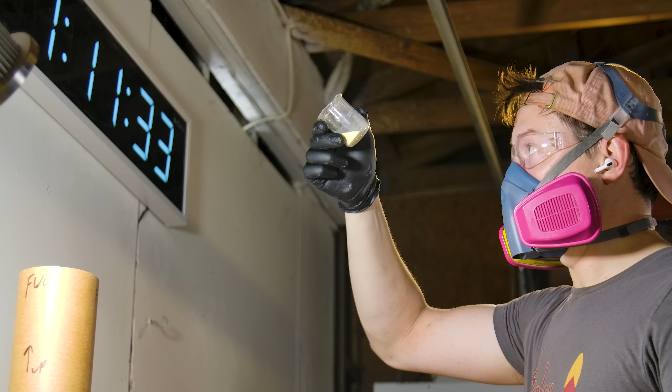3, 2, 1, fire. Nice! Okay. This is the culmination of months of work developing a new rocket propellant formula. It's a process that involved trial and error, lots of static fires on the test stand, some fires that left the test stand, and the worst mustache you've ever seen. In this video, I'll show you the exact formula for this rocket propellant and everything it took to figure out how it burns.

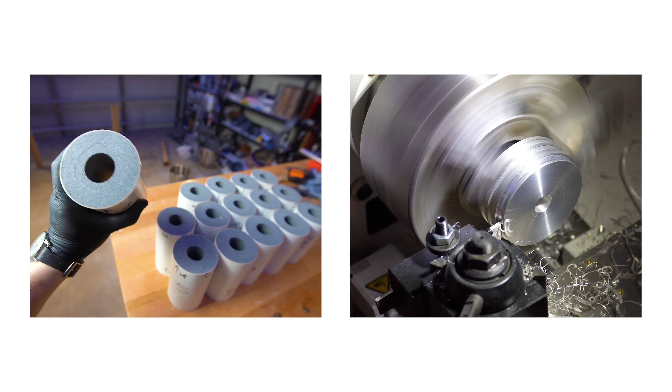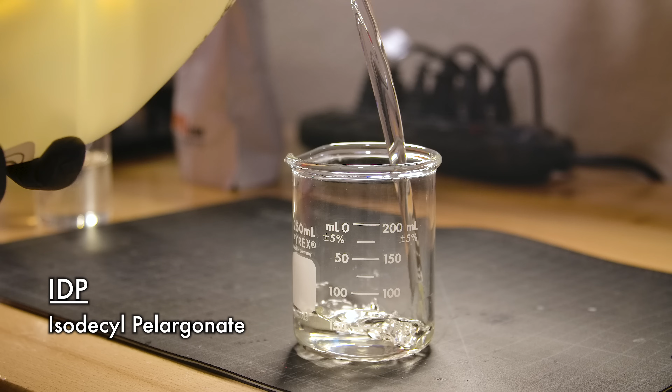I'm building a space shot, a rocket that goes over 100 kilometers. One of the biggest hurdles of this project is that I'm not buying commercial rocket motors, I'm building them myself. I've come up with a solid propellant formula suitable for these types of burns we need on the space shot, and in the last video I covered some of the basic ingredients involved, and we selected a propellant to use as a jumping off point. If you haven't seen that yet, I recommend starting there before watching this one.

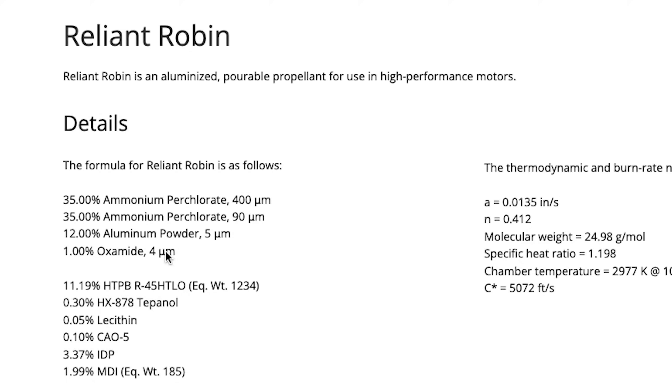This starting propellant is called Reliant Robin, and it was developed by Amadeo. The prop uses half and half 400 and 90 micron ammonium perchlorate, 12% aluminum, 1% burn suppressant, and then a multi-part binder with a few processing aids. Reliant Robin is a pourable propellant, which makes it much easier to work with, and it's actually very close to the burn characteristics I'd like.

That said, I'm interested in a slightly slower burn and increased pourability. The slower burn rate is beneficial, as a slower burn will reduce our maximum dynamic pressure and max heating on the second stage of the space shot at the small cost of efficiency losses. So, knowing our starting point, how do we take this propellant formula and slow down the burn rate? There are a few ways to do this.

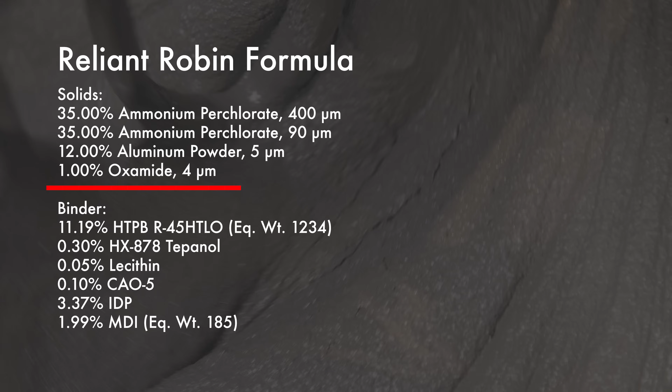You might remember from the last video, one of the components, oxamide, is a burn rate suppressant. So, how about we take that 1% and we bump it up a little bit? Of course, by doing this, we're going to end up with 101% of propellant, which, while that sounds great, we need to take that percentage point from somewhere else. To figure out where to pull this from, let's talk a little bit about ammonium perchlorate particle sizes.

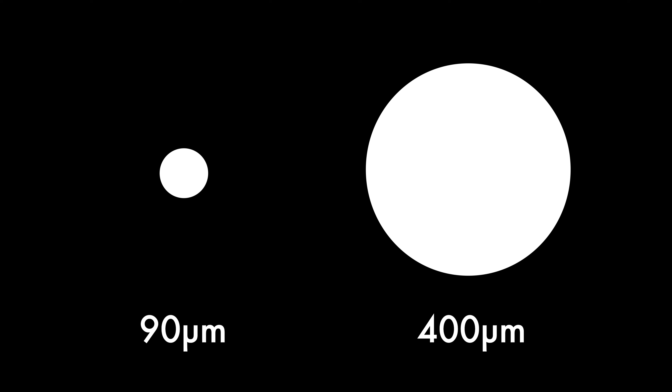On your screen, you can see two AP particles. We'll call one of them 90 and the other one 400 micron. Technically, these particles don't burn so much as they decompose really fast, but I'm going to use the term burn in this context. When they burn, they regress at the same rate. Knowing this, it's easy to see that because only the exposed faces of the particle can burn, the 400 micron particle spends much more time burning than the 90. This means that colloquially, the 400 micron particles burn slower.

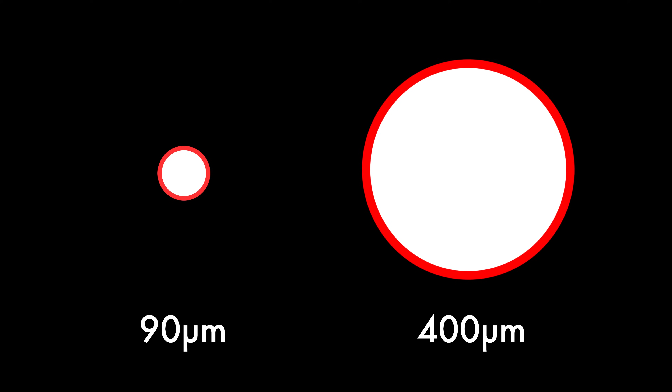In addition, an individual 400 micron particle has more burning surface area than a 90 micron particle at the start, but the burning surface area per unit of volume is much higher for a 90 micron particle because of how much more you can pack in the same space, making it functionally faster. This also makes the propellant more efficient for the same reason, and in theory you could pack an entire motor filled with 90 micron ammonium perchlorate. You'd get extremely high performance, and the only downside in our case would be that it would burn extremely fast.

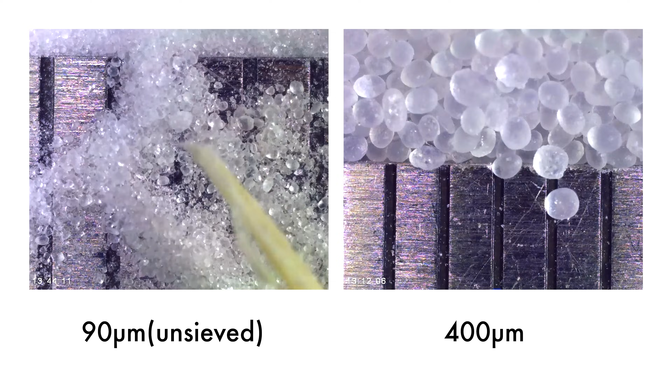Knowing all of this, that percentage change from the oxamide can come from the 90 micron ammonium perchlorate. So we'll knock that down to 34.5% instead of 35. This will have almost no effect on the propellant though. It's a very small change.

So with the knowledge that the 400 micron particle burns slower than the 90 micron particle, let's shift the balance a little bit. We'll go up to 52.5% on the 400 micron and down to 17% on the 90 micron. This is a more aggressive change, and it's not one that I was super confident in. 400 micron AP also reduces the structural integrity of the propellant a bit, but it does help with pourability.

Now, we're getting to the part of the video where I need to come clean. I'm no stranger to rabbit holes, but I have never experienced a rabbit hole like solid propulsion. I'm confident in sitting here and giving you some of the highlights, but there are aspects of solid propulsion that I still have trouble wrapping my own head around, and one of those is a field called rheology, which is the study of flow behavior. Rheology in the context of solid propulsion is all about the ratios between the solids and liquids in the formula and the particle size distributions in the solids.

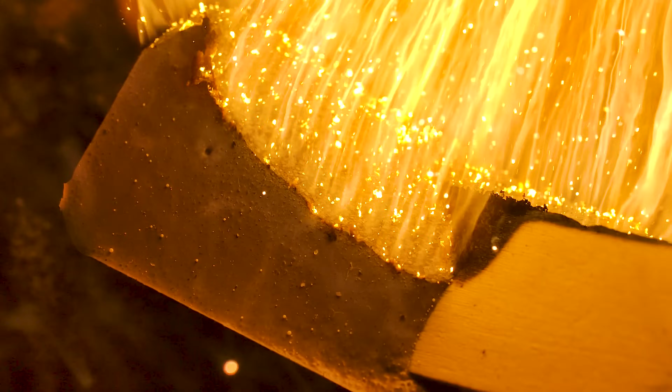We're not going to dive into this other than to say that a higher 400 micron content will help us with pourability, and with that covered, why don't we whip up a few batches of this stuff and see how it burns. My first move with this propellant was to make a few individual motors.

Before characterizing exactly how the propellant burns, I wanted to make sure that I had my processes and procedures down for mixing and casting. So I produced 3 motors with the same internal geometry and learned a few things along the way. The first batch I made was surprisingly non-pourable, which was a big disappointment initially, but it proves that I was right to make a few test batches.

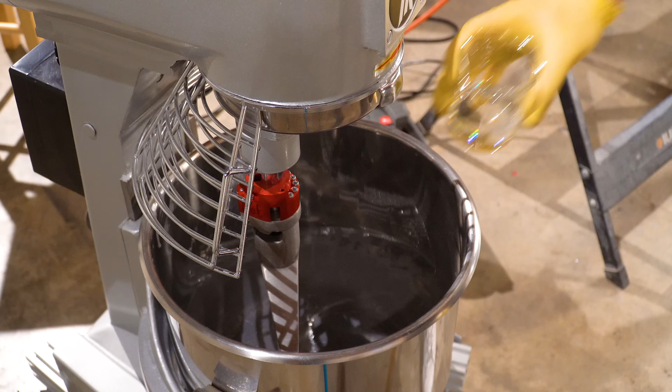The mix cycle I was using was alright, but after adding the curative in, we mixed for a further 20 minutes and aimed to vacuum degas for a whole 45 minutes, which means that the MDI curative was in for a full hour and change before attempting to pour the propellant into the liner. After seeing how poorly this poured, pun intended, I chatted with a few friends and learned that they all mixed their curative in for much shorter periods of time, so we ran a second batch and tried again.

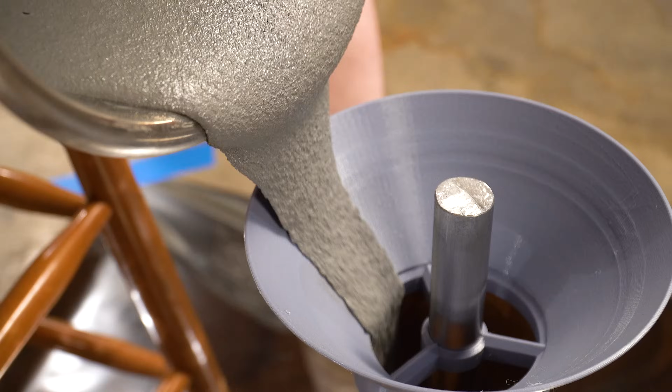On this next batch, I only mixed the curative in for about 7 minutes and vacuum degassed for 10, and the results were much better. It was the exact same mix except for the curative cycle, which was only 17 minutes instead of 65. And with this, our main issue is solved, right? Only thing left to do is extract the mandrel.

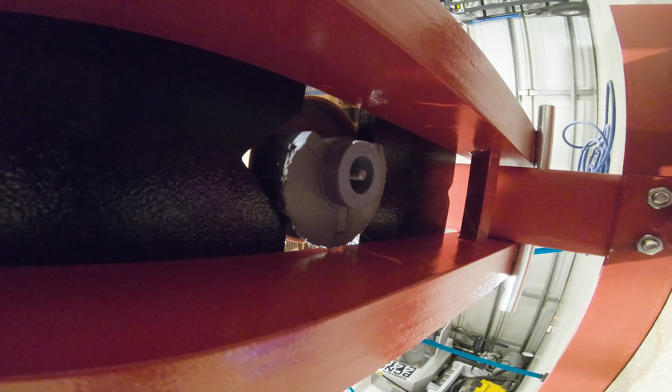I put the cured propellant under the hydraulic press and got to work extracting, and while things were looking good on the top of the grain, it wasn't so hot on the other side. Look, no disrespect, everyone makes mistakes, but I did put Charlie in charge of coating the mandrel in mold release, and he swore that he got all 3 sides. Anyway, let's make another one.

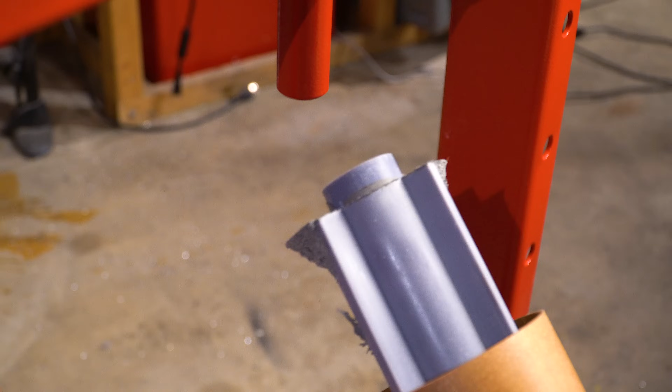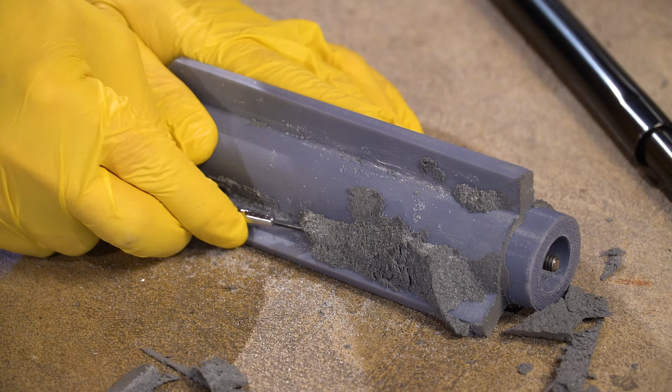On this final batch, I was starting to get more concerned about the structural integrity of the propellant. I mentioned before that pushing the 400 micron content up to 52.5% was a bold choice, and I was worried that that choice contributed to the grain pulling apart so easily. In hindsight, I am not so sure this is true, but to find a happy middle ground, I made another adjustment to the Risky Batman formula.

I brought the 400 micron content down to 43% and the 90 micron content up to 26%. I also brought the oxamide to a higher 1.9% and finally bumped the Tepanol bonding agent content up to 0.4% instead of 0.3. This was in an effort to further increase the chemical bond between the HTPB and some of those larger particles. This next mix, we focused on hitting process control hard.

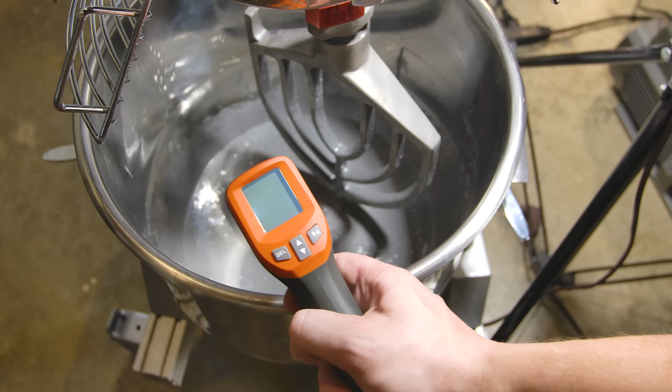I started using a program called Epsilon3 to keep track of mix timing and notate anomalies throughout the process. Keeping track of temperature, as well as making notes about small lessons learned as I went, turned out to be very important here. Sticking with the theme of importance, on this batch I took lots of care to coat the mandrel in a tremendous amount of E236 mold release, determined to never fracture a grain like that again.

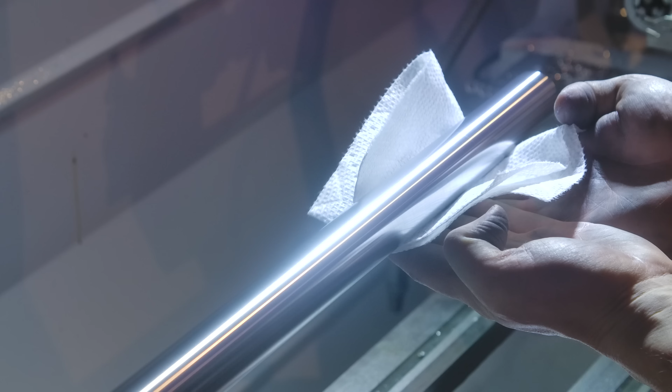The mandrel is made partially from a polished aluminum rod, but every other part I designed using the CAD program Onshape, and then 3D printed in PLA. The mandrel uses a finocyl shape at the bottom, and I designed it to slot into this base plate here, which connects to the liner.

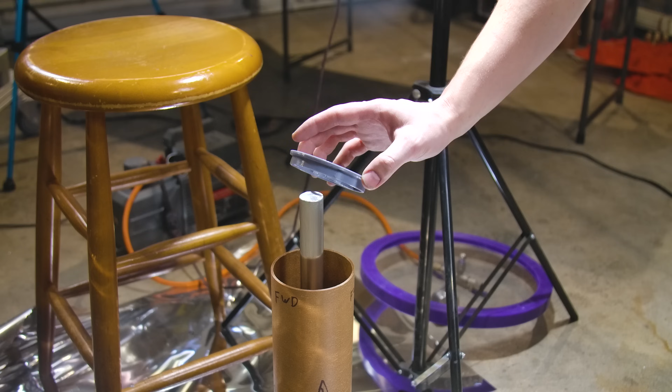At the top, I made a centering piece to hold the mandrel, then I designed a funnel to guide the propellant into the liner. I also made an attempt to let the propellant slide more freely down the funnel into the liner. On each side of the funnel, I tried something different. One side was the raw printed PLA, the other side was sanded, and the third had PTFE tape on it. The winner of all 3 of these was the raw PLA without sanding, but the trick in the long run turned out to be increasing the slope of the funnel to keep the APCP moving faster.

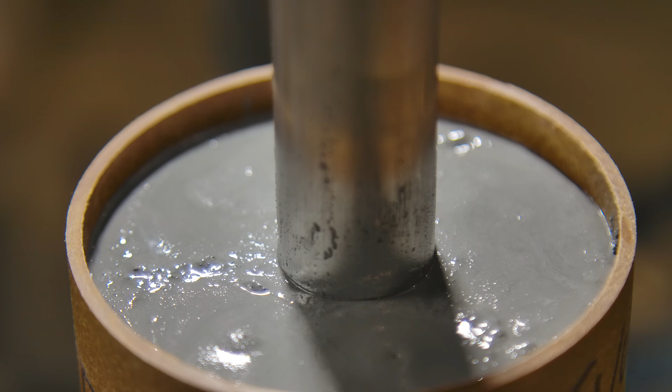After the propellant had cured for a little while, I went to go check on it, and while playing around with the mandrel, the strangest thing happened. By putting the rocket motor upside down solely on its own weight, the mold release was so effective that the mandrel slid right out with no need for the shop press. Using a copious amount of mold release had the benefit that the mandrel came out super easy, but it wasn't without downsides.

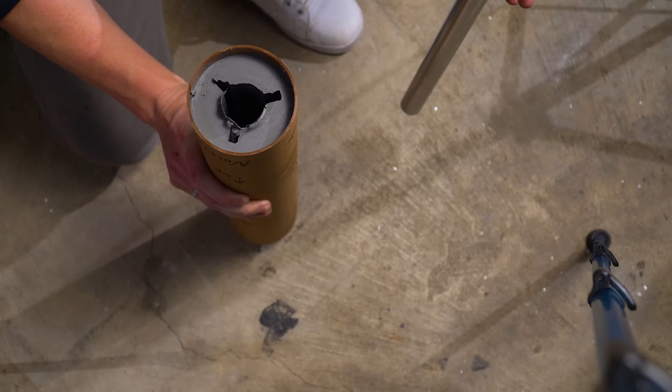The inside face of the grain had a tremendous number of small voids on the surface, and I found this strange because later down the road, while I continued seeing this phenomenon, the voids weren't showing up in the cross-section of the grain, just the inner surface that the mandrel had touched. In hindsight, I'm not entirely sure of this, but it does seem like when using an excess of mold release, the oil of the release beads up and forms these bubbles on the internal surface.

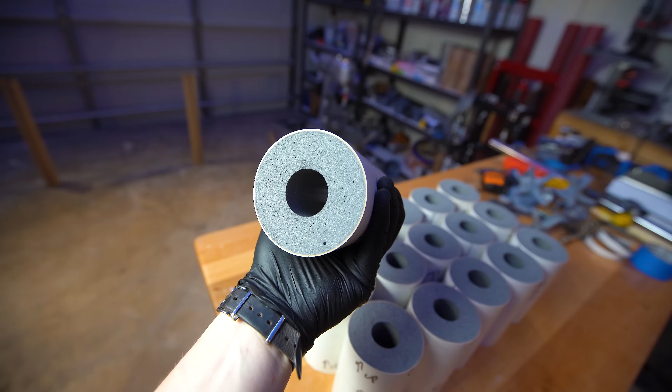But how do we really know that they're only on the inside surface? Because we can't always take a cross-section of the propellant. Instead, we do this by checking the density of the grain. With each mix session, before any propellant gets cast, I notate the exact mass of the liner, as well as the expected mass of the propellant generated from OpenMotor using the nominal density of the propellant. But wait, how do we even know what the nominal density is?

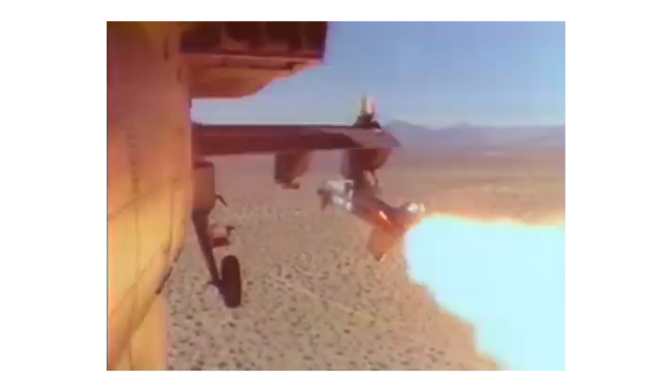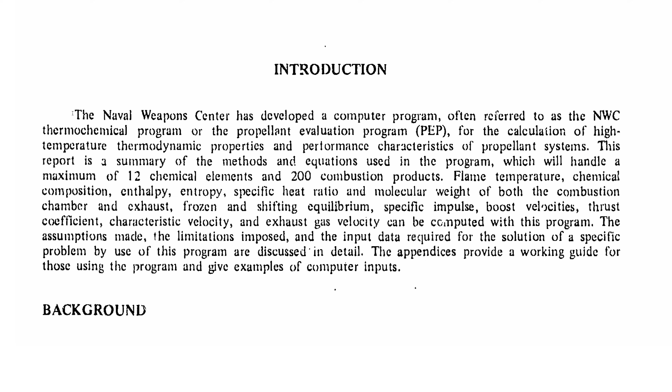Back in the 1960s, the Naval Weapons Center at China Lake started work on a computer program called PEP, or Propellant Evaluation Program, in order to model thermodynamic reactions. The program was originally built to run on massive mainframe computers, and allegedly its roots may actually go back to some older analog computers in the 50s. Anyway, the goal of the program was to handle inputs of chemical elements in various concentrations and compute the conditions of their combustion, and the products created during that process.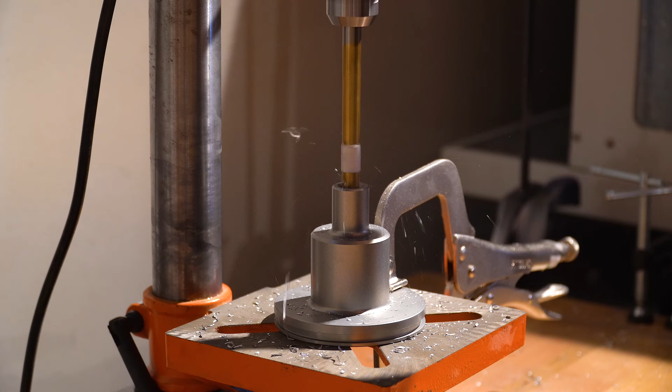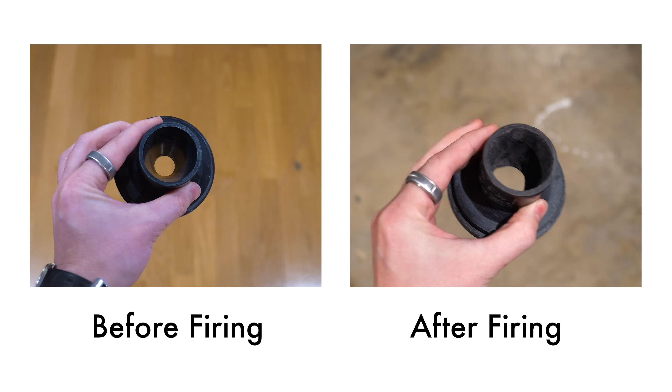So knowing this, let's finally fire some motors. These bad boys were cast into experimental motor kits sold by RCS, which means they use existing case hardware that I already have from the Send It rocket, so I can avoid making lots of hardware like I needed to do for Simplex. They use molded plastic phenolic nozzles, which means the throat diameter erodes during the burn, but for most hobby motors, this isn't a big problem, and it ends up being a lot cheaper.

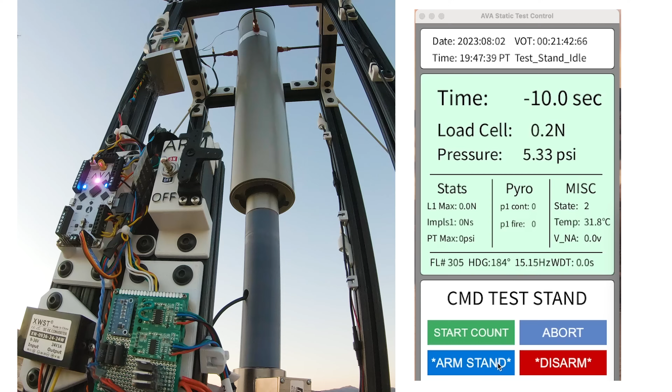All right, good enough? You ready? Let's do it. So we're gonna arm this test stand, arming stand. Stand is armed. We have continuity on Pyro Channel 1. 10, 9, 8, 7, 6, 5, 4, 3, 2, 1, fire. That is a long burn, folks. That is a long burn.

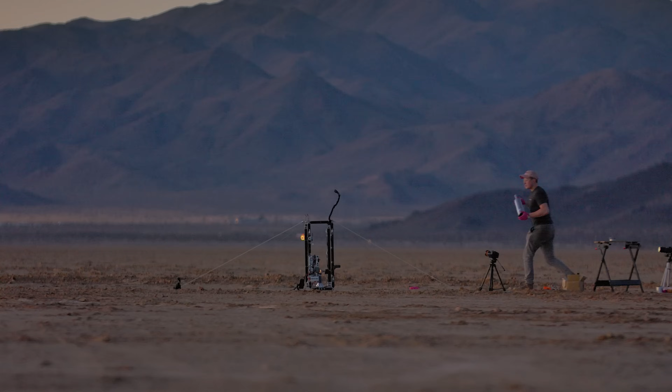With the first burn done, I removed the motor hardware and liner from the case and reloaded the new liner in for another burn. The first burn was the first motor that I made earlier in this video, and it used that 52.5% of 400 micron AP, so it's no surprise that it burned relatively slowly. The second burn was the third motor I made, which used more oxamide, but less 400 micron, so the overall expectation here is that it'll burn a little bit faster. 3, 2, 1, fire!

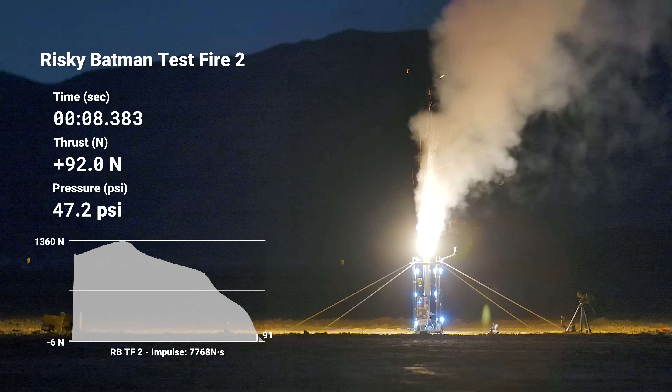Both motors stayed at very low pressures, even for amateur rocketry standards. My goal here wasn't to break any records, but just to get started mixing and casting motors. So with these two motors out of the way, it's time to characterize how Risky Batman burns.

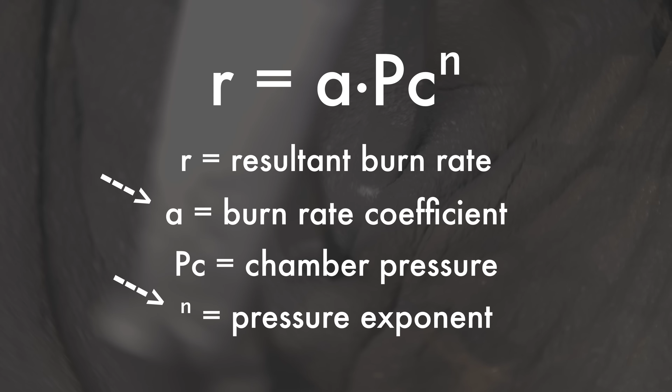If we pop back into ProPep, we can see all this thermodynamic data about the propellant, but you will notice the A and N values are missing. Those are the values we talked about in the last video. That's because those burn rate coefficient and pressure exponent values are not something we can estimate. They're metrics that we need to measure ourselves through an actual test campaign. These values will change based on your ingredient quality, your mixing hardware, your local humidity, and other factors.

And without getting too deep into the weeds, in order to measure these values, we need to conduct at least 3 burns with the same internal geometry, but running at different chamber pressures. By running identical motors at different pressures, we can evaluate how the rate of burning changes with that pressure.

Now, I say this all the time, but this is not a tutorial, so we are gonna breeze through some of this math pretty hard. I've tossed some resources in the description down below if you'd like to learn more about how all this works, but for the purpose of this video, all you need to know is that in order to be successful, we need 3 good burns of identical motors at different pressures.

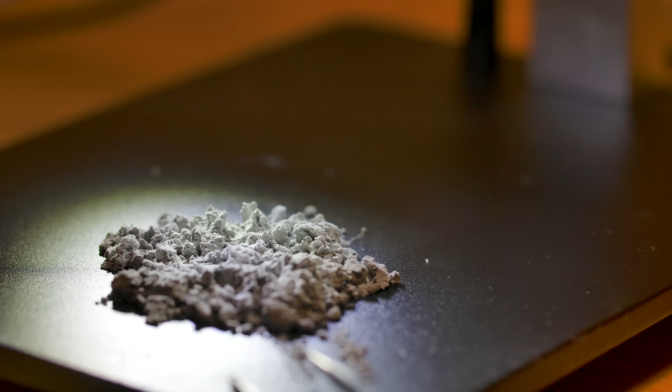Remember in the last video, I mentioned that the aluminum content of a motor will combust differently depending on the size of the motor? That is still true, and if we want an accurate idea of how this propellant burns on the space shot, we should ideally be running these characterization burns in relatively large motors. So that's what we're gonna do.

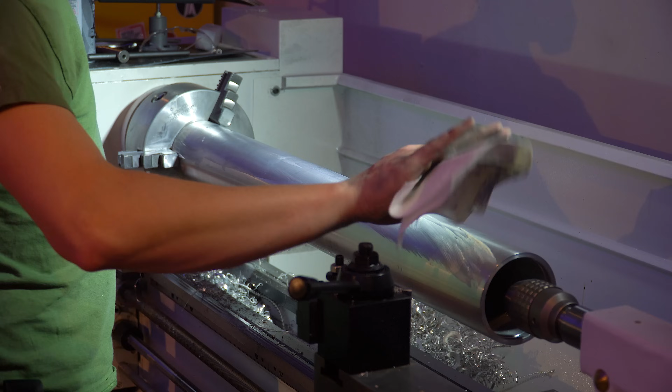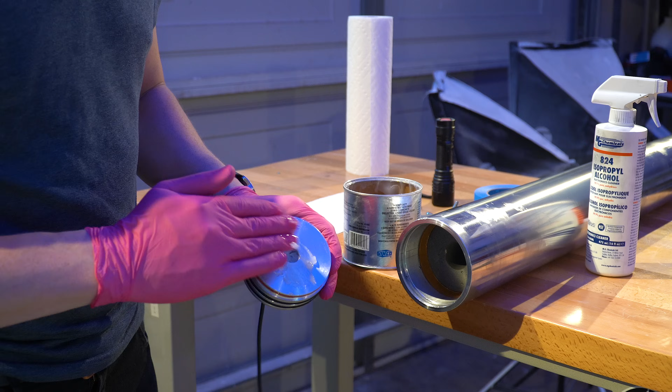I purchased a 98mm snap ring motor case, a solid graphite nozzle, a forward closure, and a few liners to run these burns. Each motor will be somewhere around the N class of impulse, and we're going to run with Bates grain geometry for these because it allows us to have a flatter thrust curve, which is beneficial for characterization like this. I purchased spiral wound paper phenolic liners, and after cutting up the grains as perfectly as I could, I bonded them into the liners and let the glue cure.

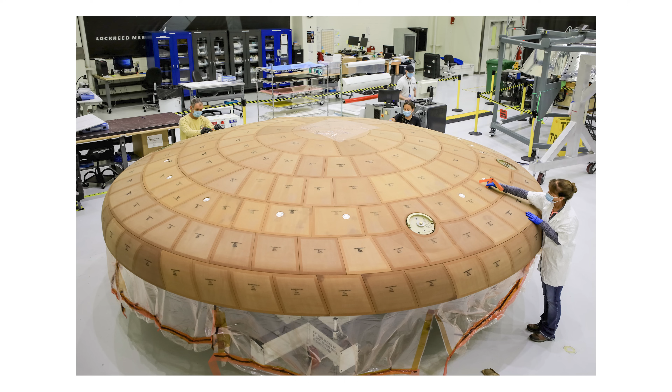A thermal liner for a rocket motor typically uses phenolic resin, which is an ablative material that chars and prevents heat from getting places it shouldn't. Phenolic is the same basic stuff used in most spacecraft heat shields for re-entry, but not all phenolic is the same. There are grades of the material and different concentrations depending on the manufacturing method. The hotter your propellant burns, the higher your chamber pressure, the greater your mass flux. All these things mean you need more phenolic content in your thermal liner.

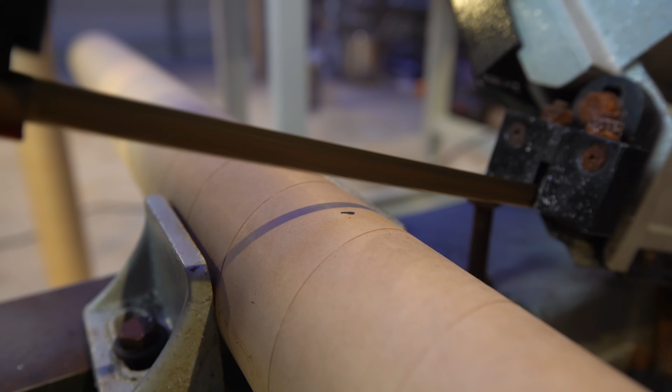While the liners I bought are fine for some relatively tame and fast burns, my goal with these motors was to push them up to and maybe over 1200 psi, meaning that I had essentially bonded grains into a set of liners that were almost guaranteed to burn through, letting hot gas hit the case wall, ruining the motor. Making another batch of propellant is honestly not that hard, it's just a tedious process.

So instead of risking it with these sketchy liners, I purchased much higher grade linen phenolic liners and made 3 brand new motors. The only difference with these, apart from the liner, was the 90 micron AP that I used. At the time, 90 micron ammonium perchlorate had been out of stock most places, so I purchased it from a new place that had just a bit left in stock, and I used it in the mix without a second thought.

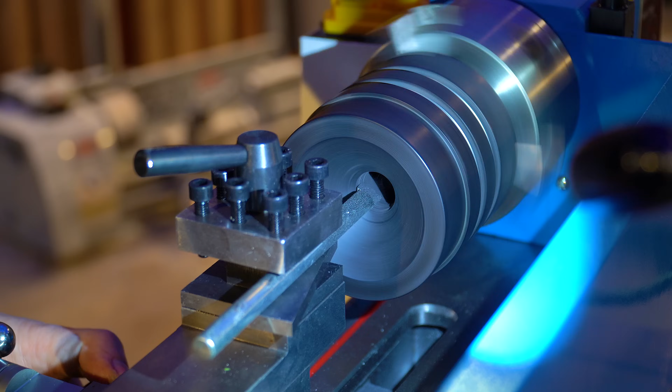Now, we need to run these motors at different pressures, but the geometry inside the motor is exactly the same, so how do we get the different pressure? By changing the throat diameter. I tossed the nozzle onto my new eBay lathe, and I opened up the throat diameter to the right size for our first burn, aiming for roughly 1200 psi. We're basing these pressure estimates on the Reliant Robin numbers, knowing that Risky Batman shouldn't be too far off in terms of performance. 3, 2, 1.

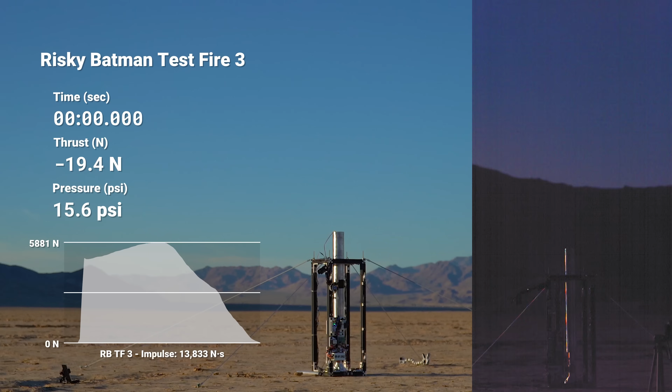Let's go. Okay, Risky Batman. Woo! That's a nice long flame. He's an angry boy.

Peak pressure. Holy shit. 1800 psi? That's right, 1800, not 1200, a full 600 psi higher than expected. Right off the bat, I knew something was wrong, and I was pretty sure that I knew what had happened.

I thought that the 90 micron AP was much closer to about 30 or 40 micron, which would have made it burn much faster. The place that I had bought it from had allegedly pulled the 90 micron they sold me from the bottom of an almost empty 500-pound barrel. When AP is stored in these big barrels for long periods of time, the fine-grained stuff sinks to the bottom, while the larger particles sort of rise to the top. Like I said in the last video, where you buy your chemicals from matters.

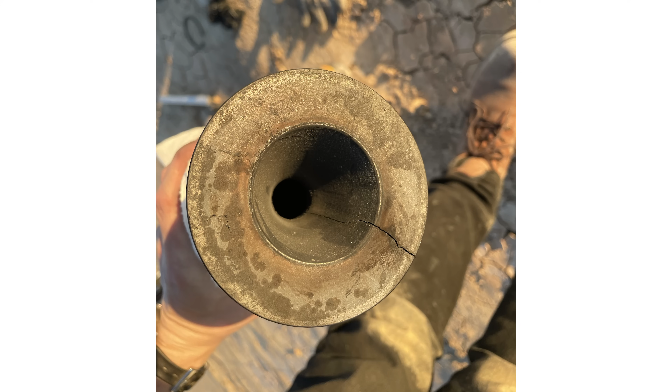The other downside of this much harder burn is that the graphite nozzle cracked. Hindsight is always 20/20, but going with a full graphite nozzle at the 98mm scale like this wasn't a great idea. Isomolded graphite can crack fairly easily, especially in larger sizes like this, and in the interest of collecting as much data as I could while I was out there, I loaded the second liner into the case, and although it took some convincing, I got the nozzle throat diameter opened up to target a lower chamber pressure and get another data point on this characterization program.

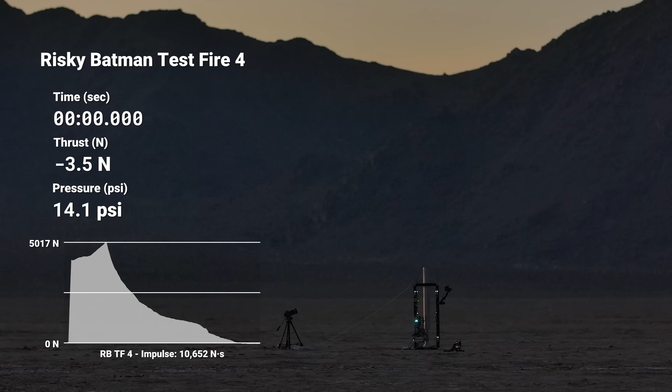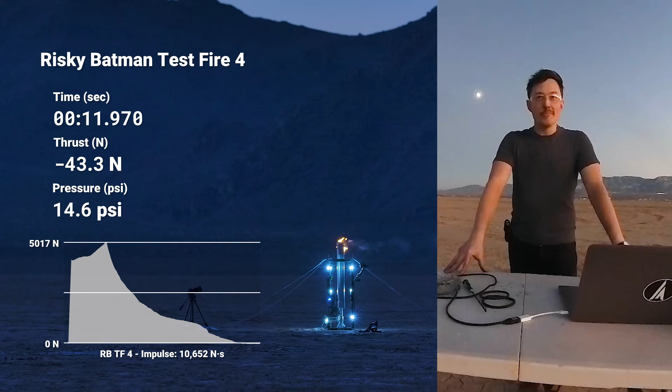3, 2, 1, fire. Yeah, there goes the nozzle. All right, we can make a new one. These are solvable problems. This is a mess. This is totally and completely a mess.

When I began this process 6 months ago, I believed I could quickly move through the propellant characterization in like a week or two of time, and I believed I'd get really accurate data because we'd run these tests at a large motor size for more complete metal combustion. Neither of those things happened. I spent thousands on propellant chemicals, hardware, liners. I spent months trying and failing to complete this process because I thought that I knew better.

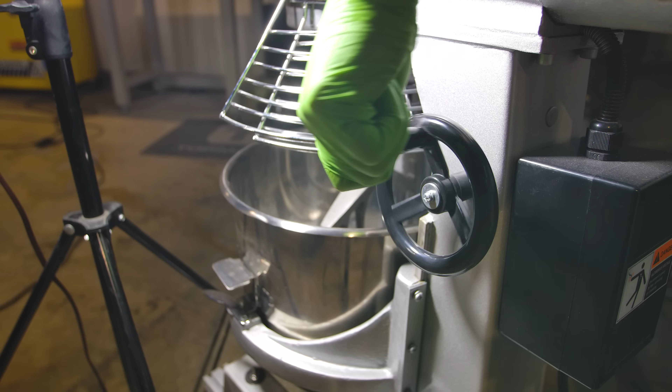At the start of this, 3 or 4 different folks suggested that I run my characterization campaign at the 54mm scale, using smaller, cheaper hardware which would allow for more burns, and ultimately a more accurate set of data. After this last burn, I set everything down for a few weeks, took a break, and prevented myself from burning out.

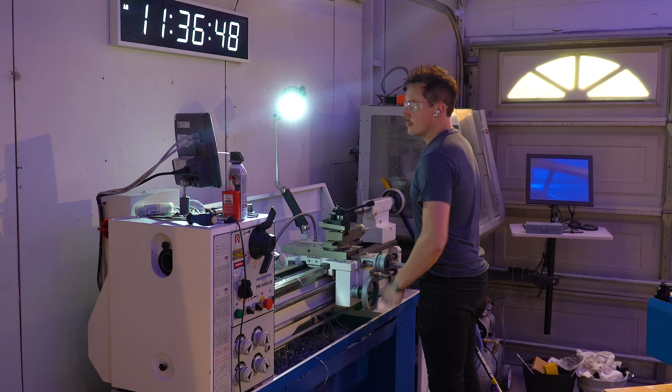Actually, this is not totally true. I had made 2 K motors with the excess propellant from the last mix session. One of them was supposed to fly on the hot glue rocket, but it shot out the back and broke the nozzle. I expected this to explode, so we brought it to FAR and strapped it to an I-beam.

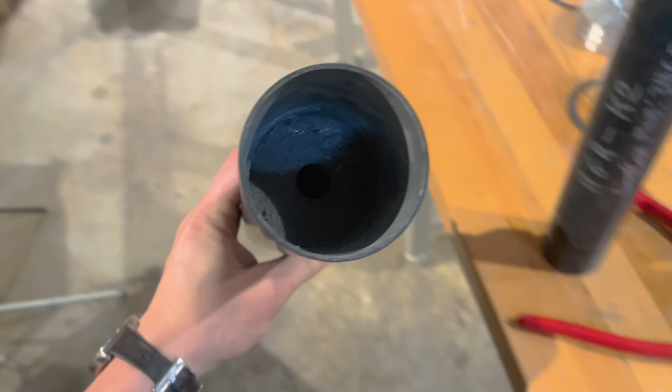I also expected the backup K motor to explode because some of the propellant inside looked a little soft, like it hadn't cured all the way. I asked the folks at FAR what to do about that, and they said dig a hole and we'll fire it in there. 5, 4, 3, 2, 1. 4, 3. Good luck. Woo!

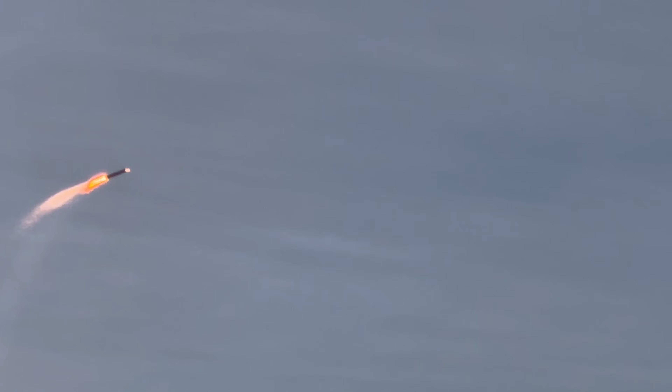Oh, whoa. Wow. Oh my God. Oh my God. Certainly one of the more dynamic static fires I've seen. Anyway, back to characterization. Okay.

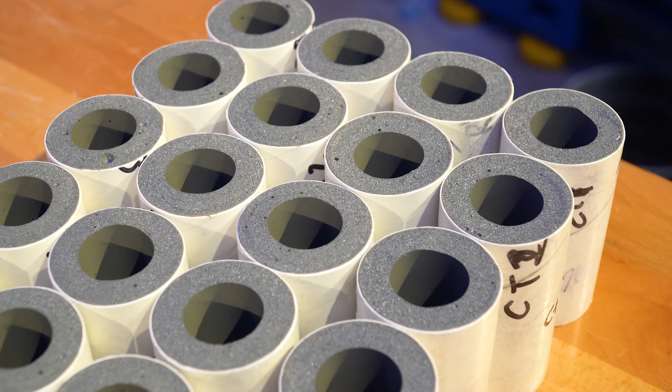After a short period, I decided to do this the way that I should have done it from the start. I purchased 2 54mm cases and hardware sets, as well as liners, and I got to work on another batch of propellant. I was able to find a new source for the 90 micron AP to fix the issues I had with it previously, and this time the quality was much better, with the particles closer to the true 90 micron diameter. Instead of just going with 3 separate motors, I doubled down and made it 6, knowing that more data points give us better data on better burn characteristics.

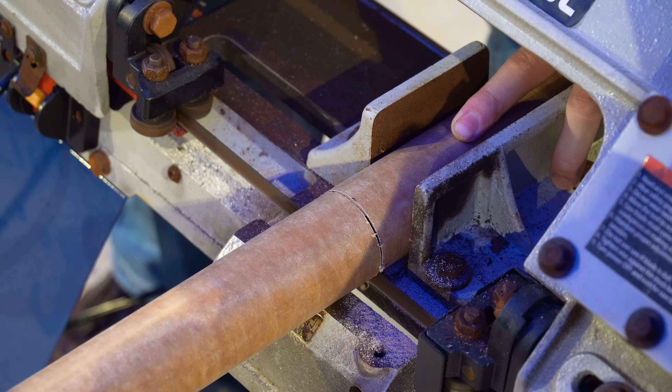The densities on these weren't perfect. I had a couple of good voids in there, but it matters less since we have more motors. On the lathe, I turned a port for the pressure transducer in the forward closure, and I got to work chopping up liners for each motor. Each set of grains got bonded into the liner, just like in the larger motors, and once that was done, I headed out to the test site.

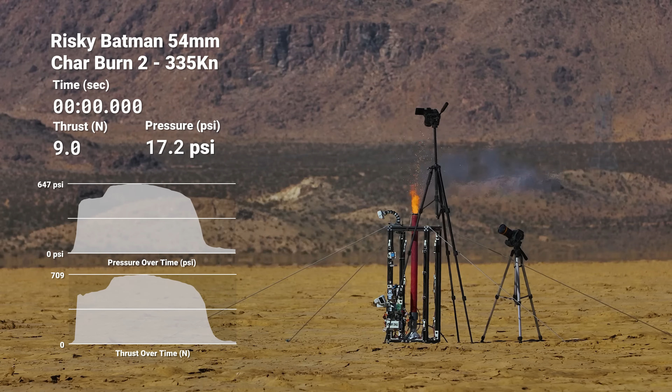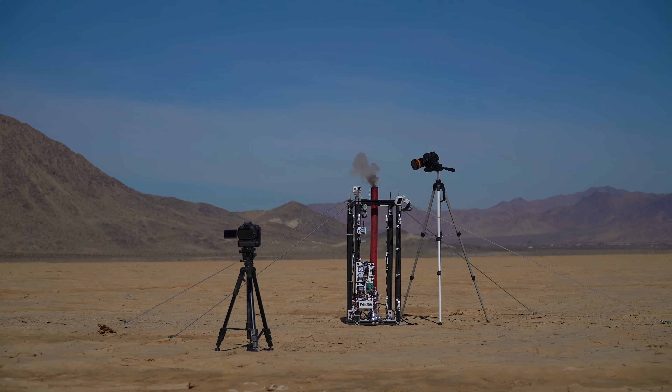Because these motors were fairly small, I mounted them all within a fiberglass tube to keep them upright in the test stand, and I was able to fire all 6 motors throughout the day without issue. 2, 1, fire. Nice! All in all, I got 6 solid burns with good data, and I was able to process that data into a usable burn rate coefficient and pressure exponent.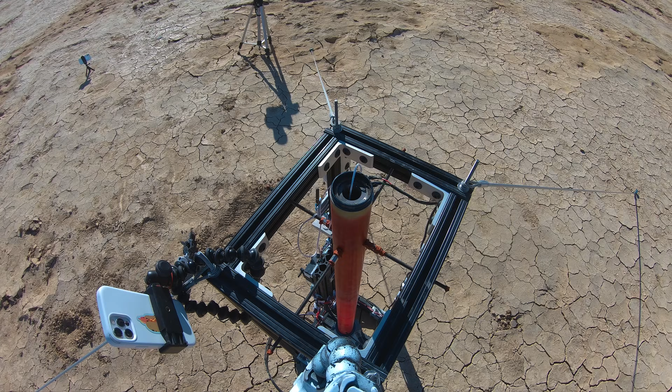I did say earlier that we were going to breeze past some of the math, and here I go, breezing past it. That said, I do want to point out a few interesting things. For each motor, we can calculate the characteristic velocity, or C star, which is a measurement of the efficiency of the propellant. The efficiency has a theoretical maximum, which we can see here in ProPep as 4,960 feet per second.

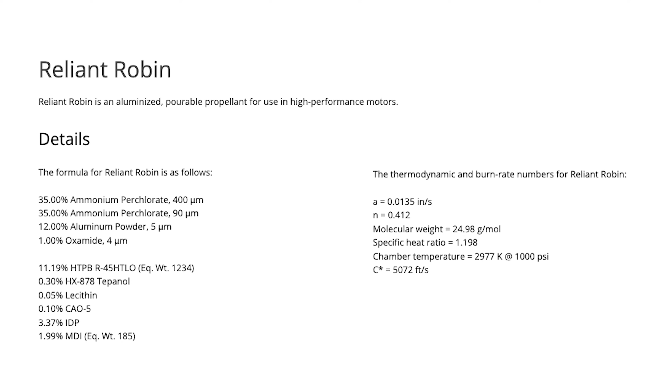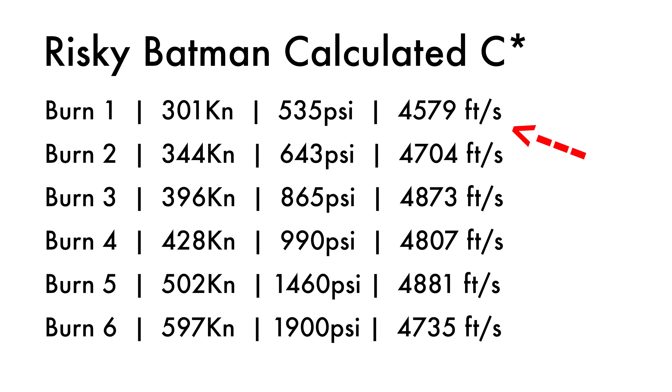This is a little bit lower than Reliant Robin, which has a higher C-star of 5,072 feet per second, since it has less burn suppressant and overall higher solids density. When we calculate the C-star for each of the 6 burns, we can see that on average, C-star is lowest at the lower pressures where combustion is less efficient, and higher as the combustions get above 1,000 psi.

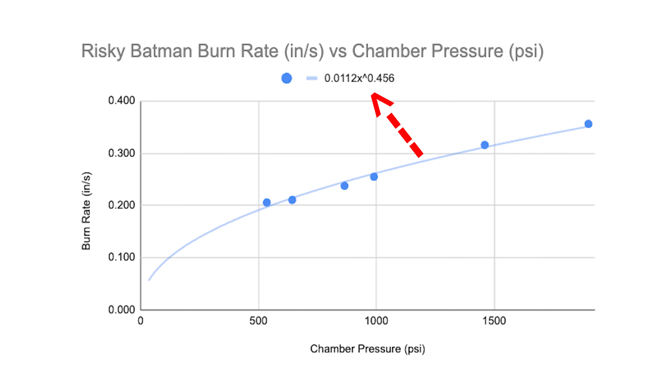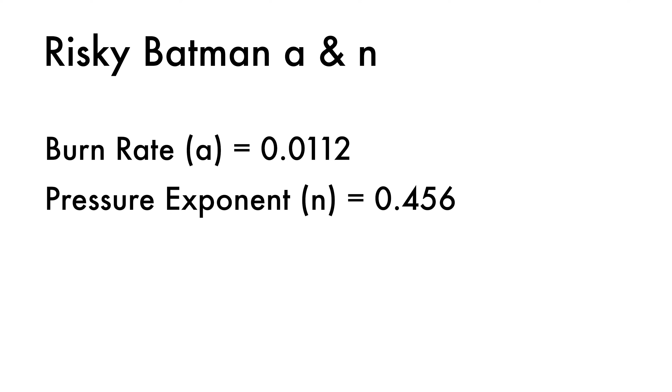In addition, we can plot the calculated burn rate in inches per second against the measured chamber pressure and use that line of best fit to define, at long last, our burn rate coefficient and our pressure exponent. This is it. This is the culmination of months of work. These 2 numbers, 0.0112 and 0.456. These are the A and N values in the equation from the last video, and we can now use these to design the geometry for the Space Shot rocket motors.

We can also compare them against known values in Reliant Robin, the propellant that Risky Batman is based on. Reliant Robin uses a value of 0.0135 as a burn rate coefficient and 0.412 as a pressure exponent. Pretty close. Very close. Frustratingly close. Our burn rate coefficient is a little slower than Reliant, which makes sense given the higher oxamide and 400 micron content, and the pressure exponent is a little bit higher. This means the propellant runs away a little faster at higher pressures and also makes sense as that's something that can happen with higher 400 micron AP. This is all of the thermo data and formula for Risky Batman if you're curious.

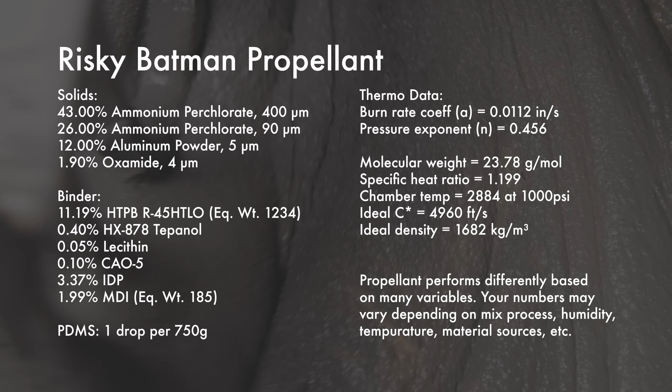That said, we're well within the noise here. Burning these 6 motors at the 54mm scale does not mean we can simulate an accurate burn of a 6 or 8 inch diameter Q motor. It helps us understand the propellant, and it's a good data point to have, and every time I burn a new motor, I can add a data point to get a more accurate burn rate coefficient and pressure exponent. But there is no truth to be reached here. Each mix will be a little different, each motor will be a little different, and just as you saw, every time I get a new batch of chemicals, my motors may burn a little faster or slower.

But running this development campaign taught me very important lessons that I'll carry forward for the next few years of motor building. Thank you so much for sticking through these videos. I worked really hard on this prop development campaign, and we have a little bit more to go in prop development with a spin casting program coming up later this year.